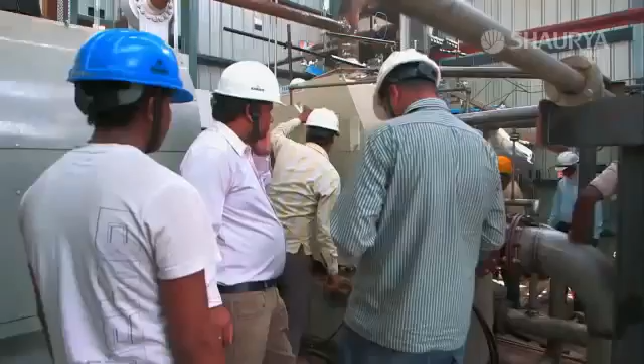We're just preparing for startup. So everything has to be in order before we can actually start up.

But nothing seems to be going as per the plan. The alignment of the shaft for the turbine seems to have taken longer than anticipated. There's a minor change in the dimensions of the shaft because it's a 25-meter long thing, and you have to achieve the tolerance of around 0.03 mm.

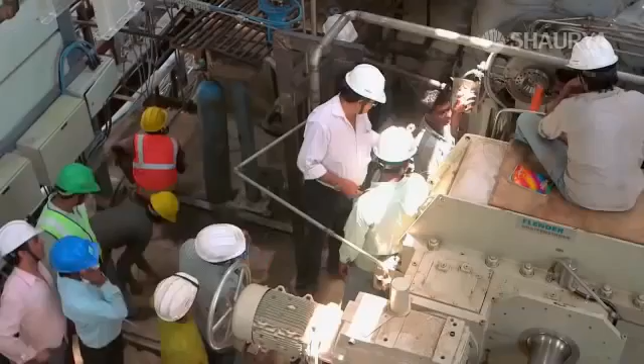Until today, the team has remained ahead of time. But now, time is ticking away, and the team is struggling to keep up.

Final alignment check is happening, and then we have to connect the coupling. We are delayed by around 12 hours.

Can this mega structure prove itself in the face of adversity? Is the plant truly ready to create a milestone in Indian history?

Mid-April, in Rajasthan, almost 190 kilometers from Jodhpur, the temperature soars well above 48 degrees, and the blowing sand forces the local residents to stay behind closed doors.

But for the 1,500-strong workforce of Godavari Green Energy Limited, it is the perfect day to be out, because this is the weather that will transform these 400 acres of barren land into a sea of abundant energy.

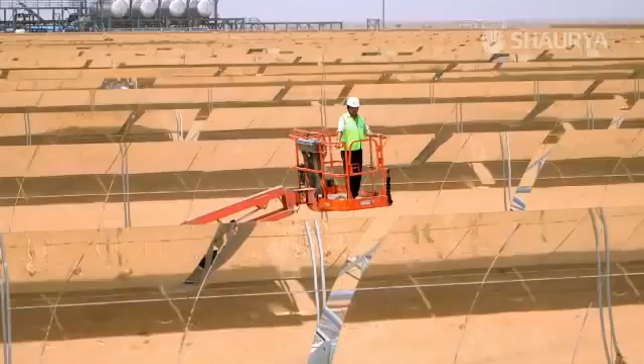At the helm of this mega dream stands the man with a bold vision and a strong resolve. He is Mr. J.P. Tiwari, CEO and Director, Godavari Green Energy Limited.

As soon as we landed on this site, we knew that this is a completely different kind of land where we have to work. We had no experience working on desert lands. It was quite difficult to demarcate the land where we had to start the work. We often lost track. We had to identify the corners of the plot, and then local Deshi jugaads were used to mark the places with red flags, and that's how we started the job here.

It was on these 400 acres of barren land that the first step in a long and difficult journey was taken. The foundation for this mega structure was laid a few kilometers away from the small village of Nokh, an area in India that receives some of the highest DNI, radiation received from the sun, as per data from NASA and the Indian Meteorological Department. We started with just the coordinates of this land and an idea that could power the nation sustainably.

The nation's population is well over 1 billion, and the energy needs of this burgeoning mass of humanity are soaring continuously. Today, India burns almost 700 million tons of coal every year, making our coal consumption the third highest in the world.

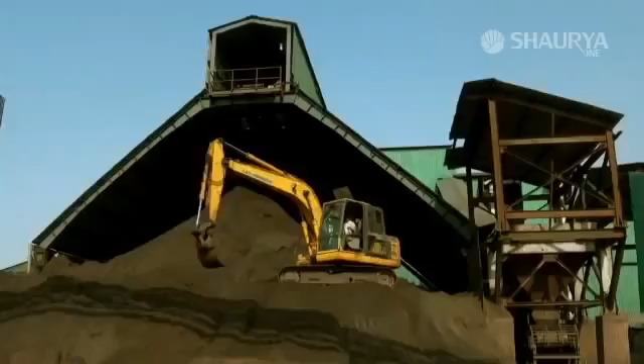As a result, India releases close to 1.9 million kilotons of carbon dioxide every year. As of today, emissions from coal-fired power plants have caused nearly 115,000 premature deaths. Despite the high cost, almost 290 million Indians still live in the dark.

It is estimated that by 2030, our carbon dioxide emissions from energy consumption will double, and more than 40% of our energy needs will depend on imports of fuel. Today, only 31% of our energy comes without fatal side effects.

It is time we stop digging for answers in the bowels of the earth. We must stop exploiting the earth's fast-dying resources and harvest instead a source of clean, free and infinite energy. One that has been benevolently blessing us with life all this time. The sun.

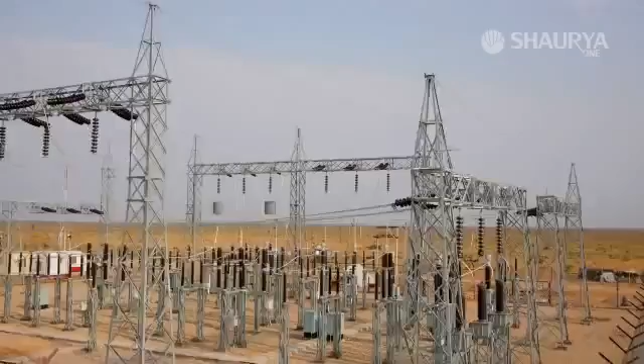The Jawaharlal Nehru mission aims to produce 20,000 megawatts by 2022, out of which the first phase, ending this year, will be 1,300 megawatts. 500 megawatts of this power will come from a technology never tried before in India: Concentrated Solar Power, or CSP, also known as solar thermal technology.

Concentrated solar power doesn't create electricity directly from sunlight. Instead, it captures and concentrates the rays of the sun to create heat, which is then used to generate power.

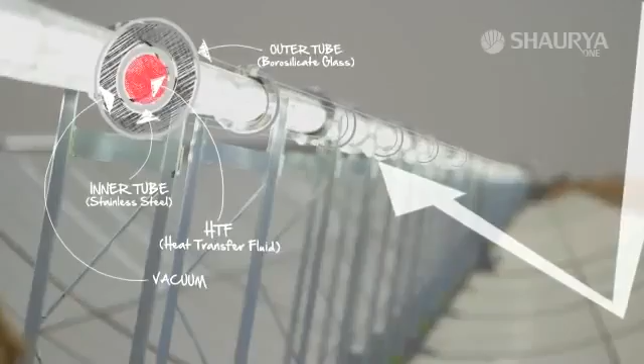With the vision of a sustainable future, Godavari Green Energy Limited set out to be the first of the 7 companies chosen under the Jawaharlal Nehru National Solar Mission to set up a solar thermal power plant in India. Godavari Green Energy Limited is a subsidiary of Godavari Power and Ispat Limited and is part of the Hira Group of Industries.

We understand the potential of green energy, not only in terms of environment, but also in terms of the economy.

With single-minded determination, the company broke ground on the ambitious project in November 2011. The land was acquired, financial closure done, and the next step was finding a good technology partner who could make this project a success. We roped in Abilene-based technology partner Lauren Engineers.

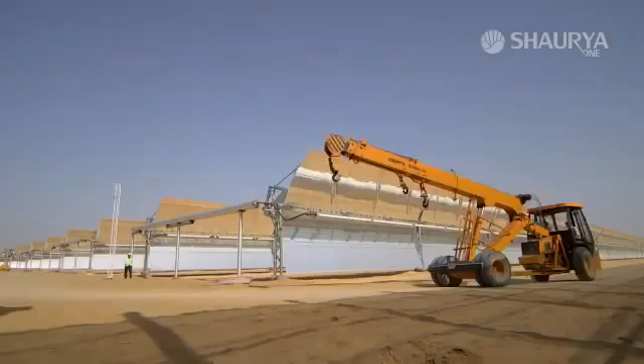The endless opportunities of this land soon became apparent. However, nobody in India had the requisite experience and expertise needed to set up a solar thermal power plant of this magnitude. With experience building a solar thermal power plant in the USA, the team behind Nevada's Solar One, Lauren Engineers, were the perfect fit for the job.

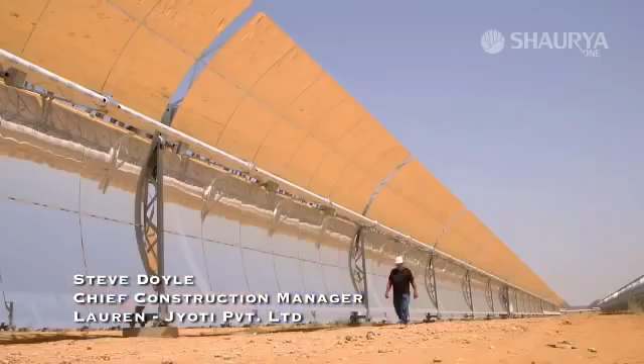My name is Steve Doyle. I'm from the U.S. I am the Chief Construction Manager.

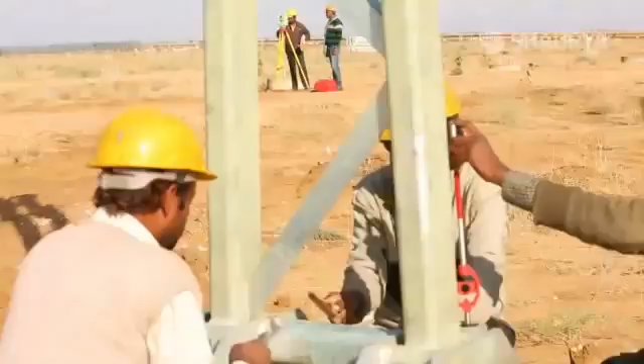The first and immediate challenge that lay before Steve was the foundation of the plant's lifeline, its 4 massive solar fields. These solar fields will have to endure temperatures that vary from -2.5 to well over 50 degrees Celsius in a year, and wind that often blows at a speed of 50 kilometers per hour.

The first step in the construction of the solar fields was the installation of 6,000 pylons. This is one of the pylons that's fabricated, and then it's hot dip galvanized for corrosion protection. It should last for 25 to 30 years.

This is a German design, and it has some minimal tolerances. We had to go out to fabrication shops and see if they were able to fabricate these parts for the frames, the pylons, and cantilever arms. It was a very difficult task.

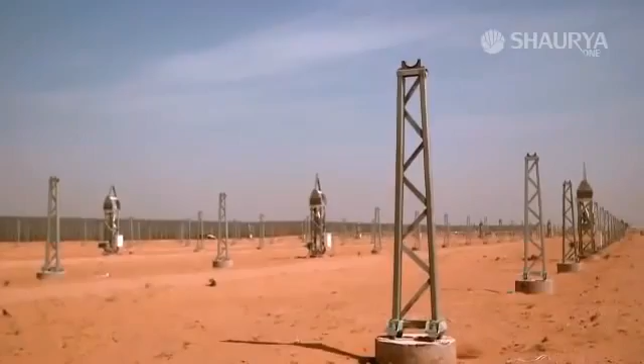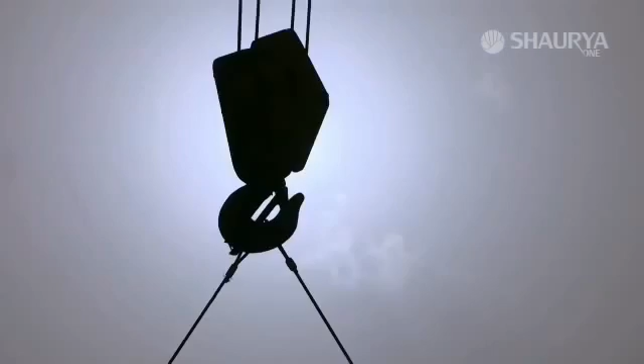The workforce took up the daunting task of installing these pylons in 240 rows. Once the pylons were erected, the crew began to assemble and install the 5,760 frames for the parabolic mirrors. Each day the crew strived to meet their deadlines and assemble an average of 40 frames a day.

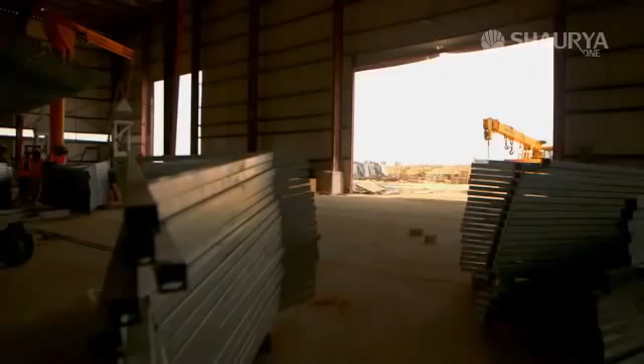This task would have been challenging for a trained team of professionals. But for the untrained laborers of Rajasthan, it threatened to be nearly impossible.

One of the hardest problems starting this project was the training process. We had to train all the people that worked on this project. Most of them are local people; all they've done all their life is farm. We took time to teach them the special duty, the tasks they perform, and they have turned out very good work. The language was a problem, but we placed supervisors who could speak English and Hindi.

So it takes 25 to 40 minutes to do both sides. Yes sir. Then you pick it up and set it on the stand, and then our turning unit will come down. It grabs and it rotates.

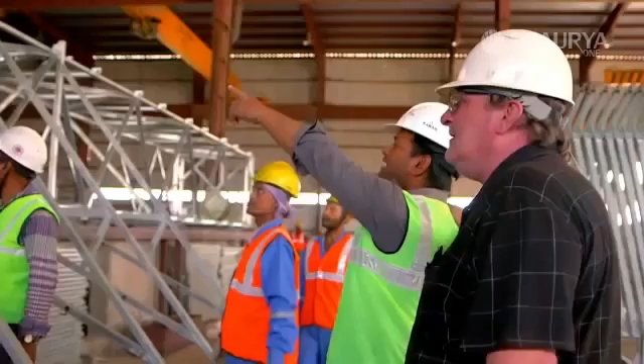Under the supervision of Hindi-speaking supervisors and Steve's guidance, the indigenous labor force proved to be quick learners. One Indian word that I've learned over a year is theek, okay.

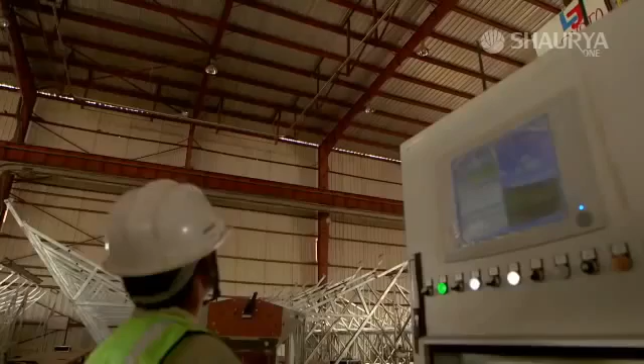Once the frames have been declared theek, they undergo photogrammetric testing. A high-definition camera clicks 38 photographs of the frame. Its software automatically verifies the dimensions of the trough to ensure that it will accurately concentrate the rays of the sun onto the receiver tube.

After this process, the frames will be ready for the most delicate and expensive component of the plant: the parabolic solar mirrors.

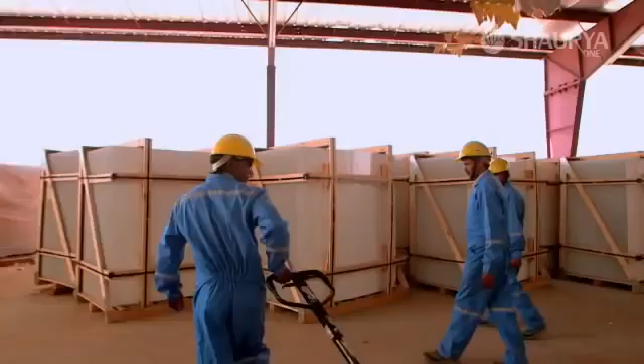We had these mirrors from Flabeg. Flabeg has manufacturing units both in the US and Germany, and in fact some of the mirrors came from Germany and some from the US.

These cutting-edge $75 a piece mirrors have to be fitted onto each frame separately.

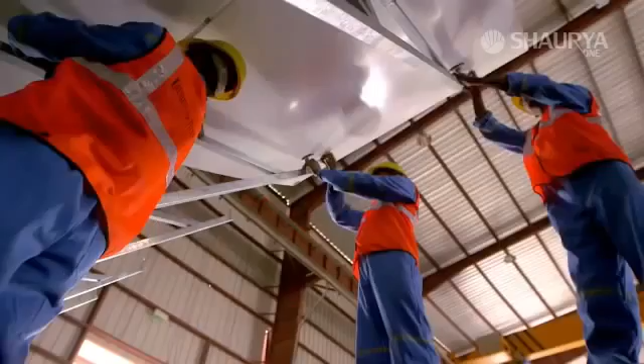Mirrors have to be as clean as possible. You need to reflect as much radiation as possible into these receiver tubes that act as thermal storage or thermal absorber. If there's dirt on this, you have interference and the radiation going back to the absorber would be less. So you would actually be generating less power from the sun than what is expected.

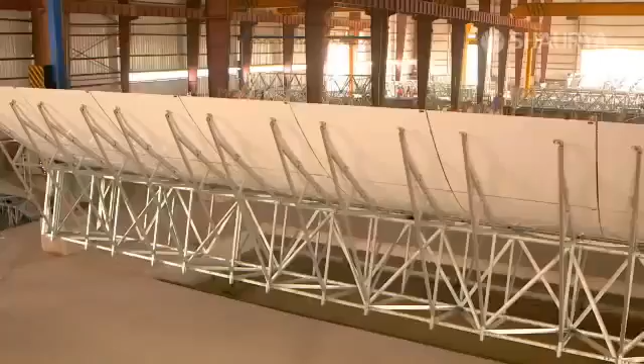Every frame holds 28 mirrors, creating one solar collector element. These mirrors are made of white glass and are extremely thin and clear, unlike regular glass, which has a green tint due to the presence of iron.

Coated with silver, one of the most reflective substances known to man, the solar collectors reflect more sunlight than normal mirrors. By the end of the construction, the plant will have 5,760 solar collector elements, or SCEs, installed in rows.

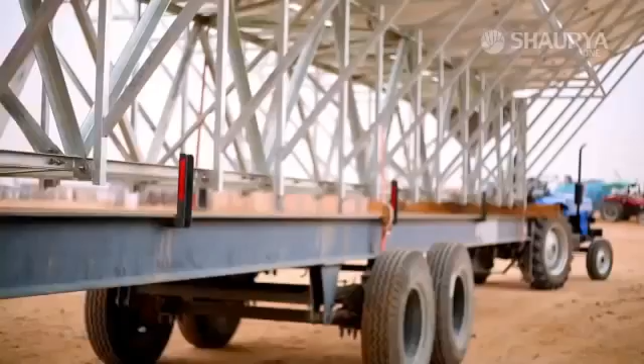The length of each row is the same as that of 4 massive Boeing 747s lined back to back. The team had only 6 months to finish installing all the solar collector elements, which was no easy feat due to their very delicate nature.

There are some limitations. Just like these mirrors are so delicate, we have to run the vehicle at around 5 to 10 kilometers per hour. In a 12-hour shift, we are erecting around 25 to 30 panels.

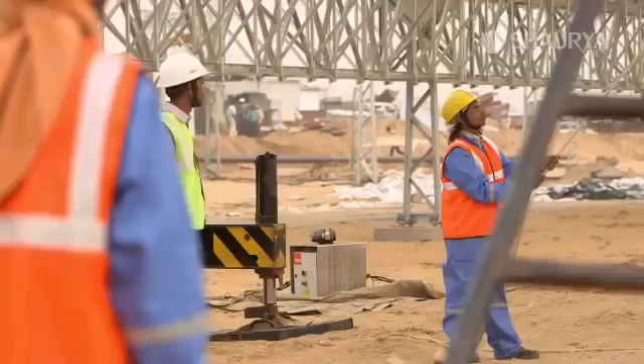This is a race against time, and we are trying to achieve it. At the peak of construction on the site, thousands of workers were working hard to stay on schedule.

Until they hit a roadblock. 7,835 mirrors had reached the plant in shatters. These mirrors were part of a consignment that had traveled a distance of almost 12,000 kilometers.

With only a few months left for the plant to be commissioned, several rows of solar collecting elements remained to be installed.

The 7,835 mirrors from one of the consignments, which had traversed a distance of over 12,000 kilometers, had reached the plant in shatters. These mirrors reflected their dreams, and as their shards lay scattered in the dust, it seemed a crack had appeared in their plans.

With only a few weeks left for the plant to be commissioned, several rows of solar collecting elements remained to be installed. These mirrors were insured.

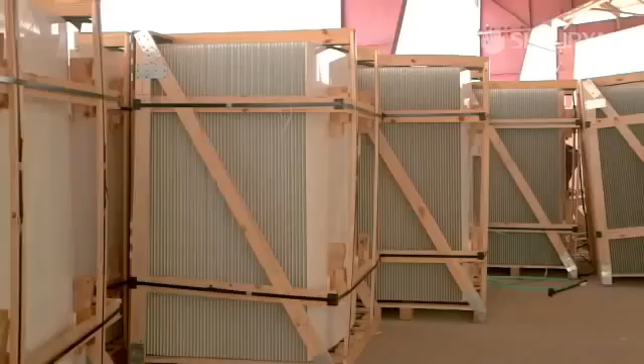We got it replaced. It took us around 2 months to get them back from Germany. And we still feel that even though we have lost 2 months, we would be able to make it up in good time. New mirrors arrived, and the construction resumed after a setback of 2 months.

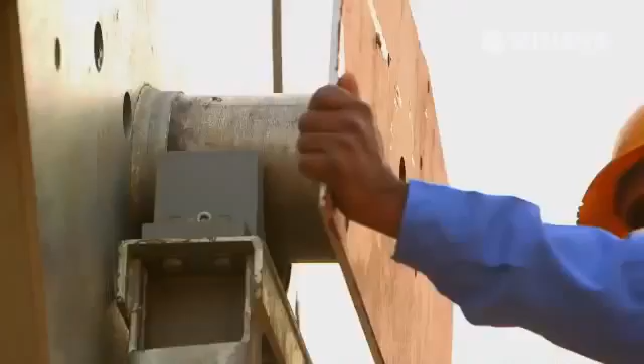To get back on schedule was a daunting task, but armed with experience and determination, the team doubled their efforts in assembling and installing the parabolic troughs.

Putting mirrors together is fairly simple. Building 5,760 parabolic troughs was a challenge.

4,000 parabolic troughs were in place. In the next 3 months, the team had to finish installing approximately 1,700 troughs to finish the plant in time for commissioning.

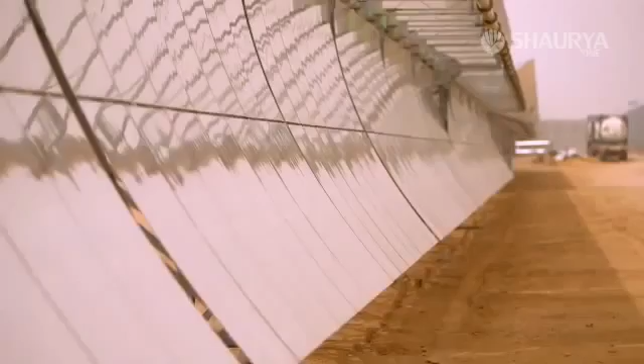Central to these operations is another expensive and complex piece of technology: the receiver tubes. These tubes are designed to trap the maximum amount of heat reflected by the mirrors.

This is the high-end product that actually absorbs the radiation coming in from the sun, being reflected from the mirror into this. This has a property like it has a steel tube through which the HTF is circulated.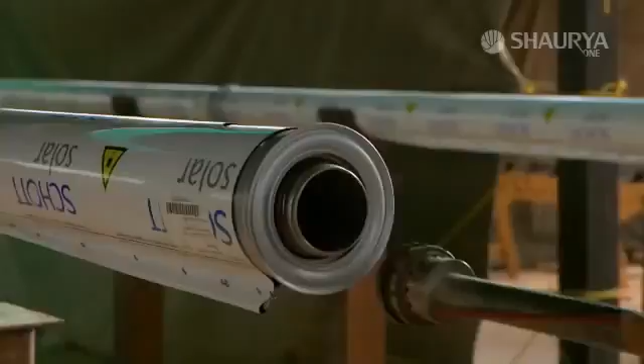Their construction involves the extremely difficult feat of welding glass with metal. This technology doesn't exist in India. The tubes at the plant are from Schott Solar, one of the only 2 companies in the world that manufacture them. These tubes reached the plant after covering a distance of more than 8,000 kilometers.

Once they reached the site, 3 of them were welded together to form a single 12-meter long receiver tube. The team's target was to eventually install 17,280 of these receiver tubes.

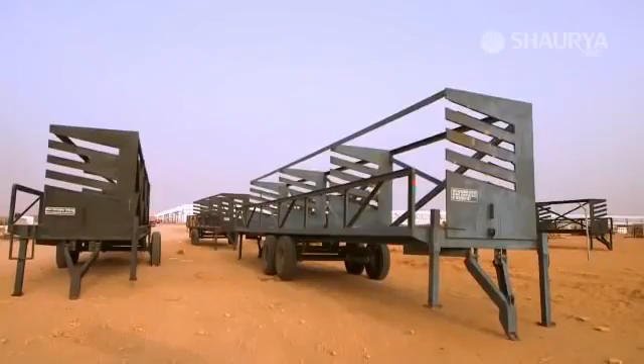However, safely moving these tubes to the solar fields was a challenge. For their transportation, 8 custom-made carriers had to be fabricated locally, each with a capacity of 72 tubes.

These thin tubes will carry 1,100 tons of heat transfer fluid, or HTF, through all 4 solar fields. This fluid will run through the 240 rows of solar collectors and heat up to a temperature of 393 degrees Celsius.

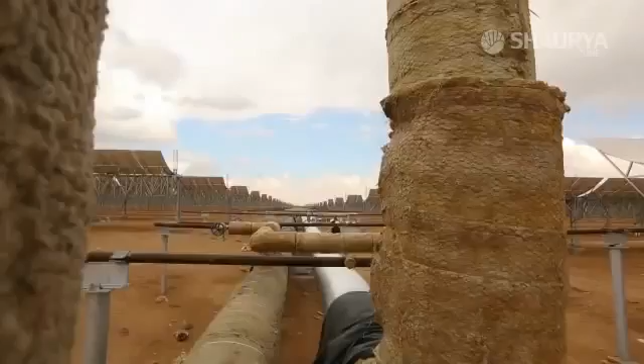This scalding liquid will then flow through seamless carbon steel pipelines. Clad and insulated with rock wool, these pipes will not let the fluid cool down.

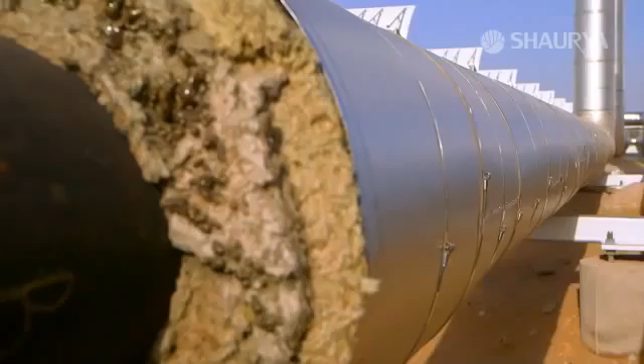Keeping the plant's commissioning deadline in mind, this heat transfer fluid was ordered well in advance and arrived at Kandla Port, Gujarat, one of the largest ports in India.

This fluid is manufactured in the United States and is transferred by bulk shipment to India. Depending on the design of the concentrated solar power plant, the plant may require anywhere from 20 to 30 metric tons of fluid for every megawatt of power.

In Godavari's case, their plant capacity was 50 megawatts, and we supplied approximately 1,100 tons of fluid. This synthetic fluid must be stored at a temperature of 60 to 65 degrees Celsius and hence will remain here in these temperature-controlled shore tanks until the plant is ready.

From the solar fields, the fluid will then flow to its ultimate destination, the heart of the solar plant, the power block. This steel structure, worth rupees 180 crores, is the place where the sun's heat will turn into 100% clean energy.

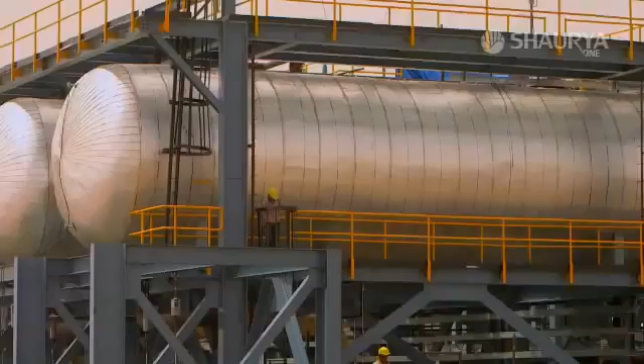It took a dedicated labor force of over 500 workers, working round the clock, nearly 6 months to complete this vital element of the plant.

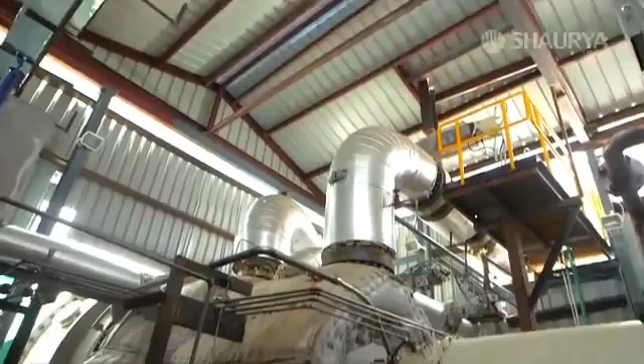At its center lies the most expensive element, its raison d'etre, the turbine. The 213-ton piece of machinery was shipped to India all the way from Sweden. When you consider the size of the plant, you begin with turbine capacity and then you back calculate all the other things that would be serving, like the steam generation required and then the heat of the steam, and based on that the solar field is designed.

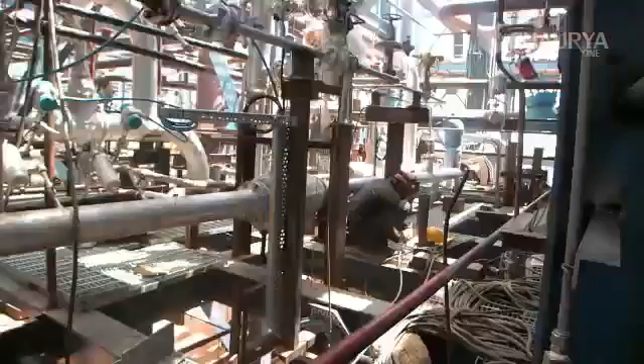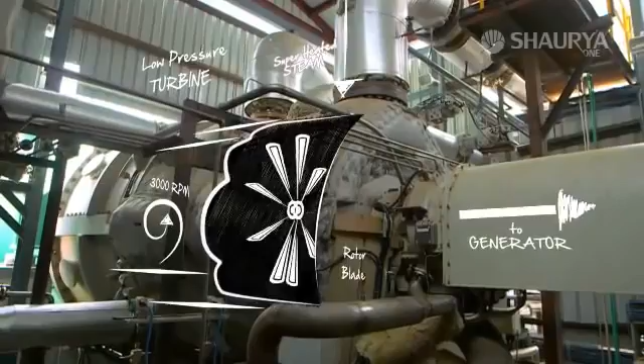Before the turbine can begin power generation, the fluid needs to reach the steam generator. Supplied by Aalborg CSP of Denmark, the steam generator weighs nearly 615 tons. Here, pipes containing HTF will exchange heat with 257 tons of water per hour, generating superheated steam up to the temperature of 385 degrees Celsius. This steam will then be used to power the turbine, which will then generate the precious megawatts.

At the end of construction, each component of the plant will be fully automated using proprietary software from Rockwell Automation. Each piece of machinery, from the parabolic troughs to the turbine, will be controlled with a single click.

When people come together to design the future of energy in India, it has to be ensured that their own energy doesn't run out.

Approximately 1500 workers are working in this area, and it becomes very important for us to create an environment so that the morale of everybody stays high and they can perform better.

And what better way to recharge than finding a family away from home? A family with which you can share your dreams. And friends with whom you can unwind and let go of the day's stress.

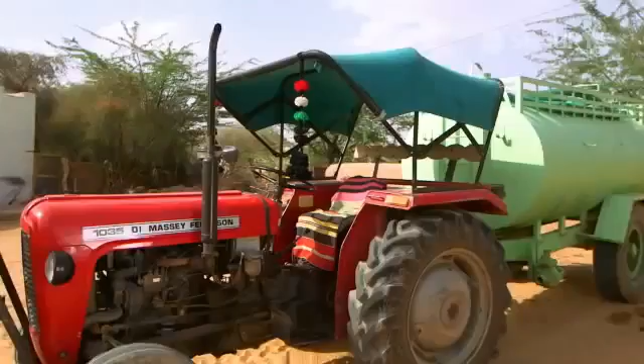Meet Raju and his brand new tractor. This is Raju's brother. This is their favorite ride, Raju's motorcycle. Raju wants his brother to grow up to be an engineer.

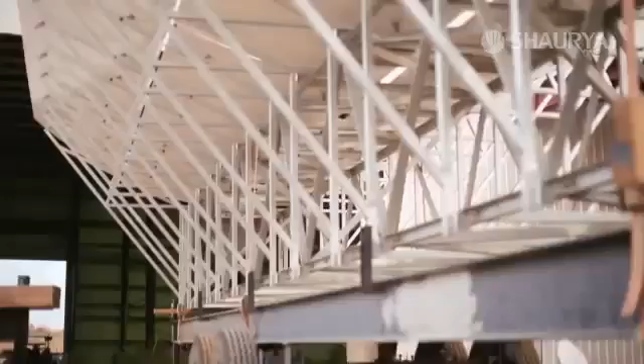This morning, the sun is shining a little brighter on Godavari. Today, Raju has a very important task to perform. Amongst his other tasks at the plant, he will drive the last panel on the 4th solar field.

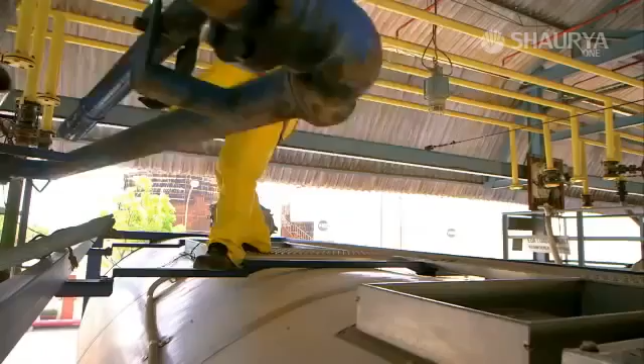Meanwhile at Kandla, the heat transfer fluid has been transferred from shore tanks onto 45 road ISO tanks of 24-ton capacity each.

These road tanks are on their way to the plant site, crossing 2 states and covering a distance of nearly 700 kilometers.

Today, after 18 months of work, the team is entering the final innings. They have assembled the parabolic troughs that will gather the sun's rays.

This is the last trough we are erecting, and this will complete our 120th loop.

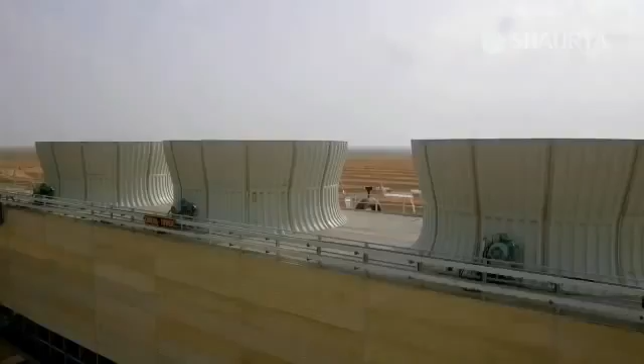Thus, the last jewel has been added to the centerpiece of this plant, the solar fields. In spite of being challenged at every step by both nature and technology, the team has met the deadline. In just 18 months, they have transformed hundreds of acres of barren land into state-of-the-art solar fields.

We are happy now, and our next step is to run the plant, start generating the megawatt. So I congratulate all of you, and let us look for the new target.

The fields are complete. The team's next challenge is to become the first of the 7 solar thermal power plants under the Jawaharlal Nehru National Solar Mission to generate power, and to prove that in the long term, solar energy is a viable economic option.

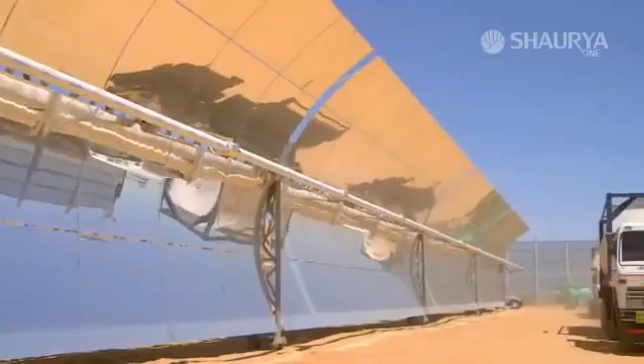The heat transfer fluid has arrived from Kandla port just as the solar fields are ready. As soon as the fluid arrives, the team begins to empty the fluid from the road ISO tanks to the HTF expansion vessels. Once the heat transfer fluid is in the pipes, the pumps must be started to ensure that the fluid circulates throughout the fields.

In keeping with internal deadlines, Mr. Avikal Dubey needs to have the HTF pumps up and running by tonight. It is proving to be a long night for Mr. Dubey and his team. They have been working ceaselessly with the sole agenda of having all 4 pumps running before sunrise. And just before dawn, the team meets with success.

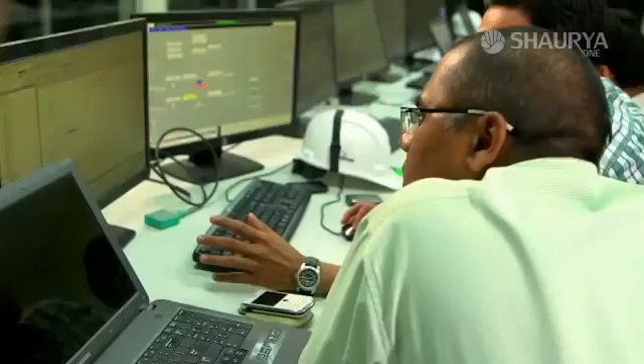One milestone you can say we have achieved, that we have given command from this DCS system and the motor is started in the field.

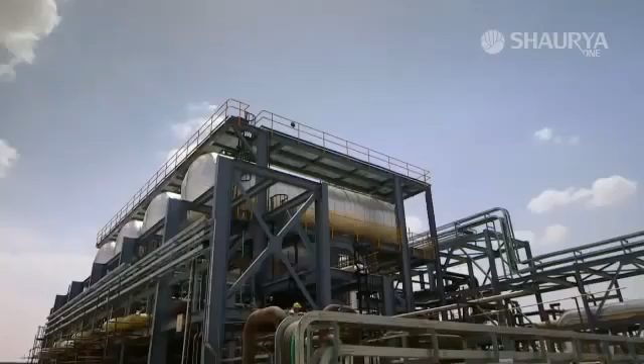It is now time for the last major process before commissioning, air and steam blowing. In this process, the pipes that will carry the superheated steam to the turbines will be cleaned.

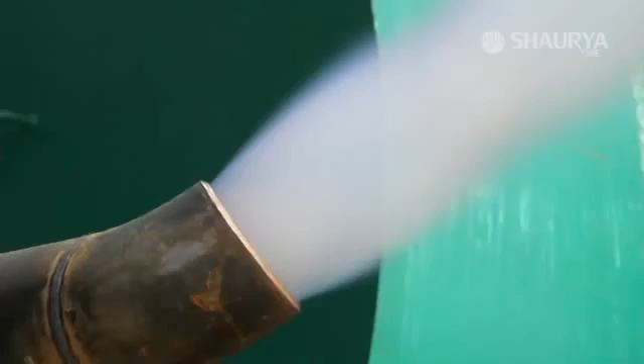With air and steam blowing over, the team gets busy carrying out final checks and balances before commissioning. With so many components coming together, things can often go wrong.

This time, it is the solar collecting elements. We have put these solar panels in auto mode. They will automatically track the sun. Most of the panels are right now tracking.

A few have a little communication problem, like a command that is generated from the DCS that comes to the local panels, and few of them have a little communication problem in the fiber optic cable or in the card. So our instrumentation guys are checking them.

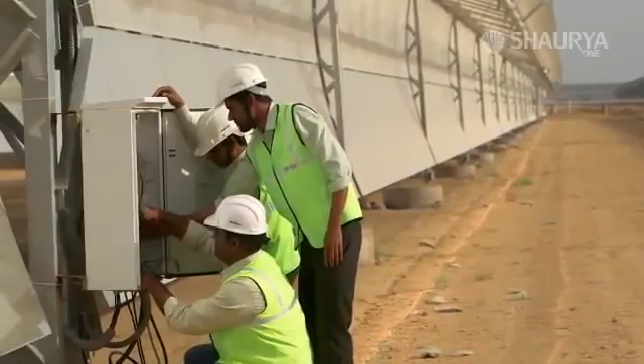Once these defective panels are attended, the communication is set properly. It will be put on track mode automatically, and the whole solar field will start tracking the sun together as a group. These solar collecting elements will move approximately 15 degrees per hour to track the sun, their only fuel.

Components of the plant are in place, and the destination of this remarkable journey is near. The day of commissioning approaches, the day when all these components will come together to generate power.

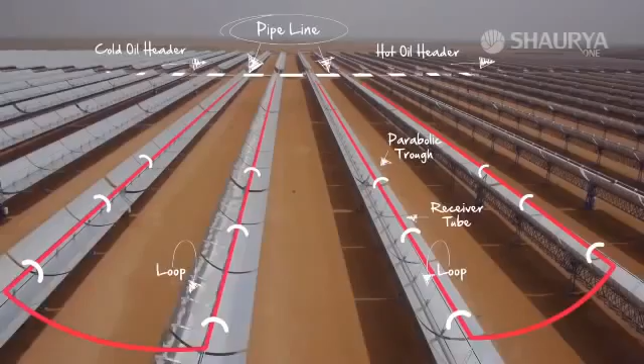The parabolic mirrors will focus the sun's rays onto the receiver tubes filled with heat transfer fluid. The HTF will then travel through all the solar collecting elements in a solar field, absorbing more and more heat. Eventually, its temperature will increase to nearly 393 degrees Celsius.

This extremely hot fluid will then pass through the steam generator, where water is turned into superheated steam. Finally, this steam will drive the turbine to produce electricity.

What had started out as a mega dream will today become proud reality. The day of commissioning is today. Mr. Tiwari is leaving early to take charge of the final countdown to harvest the sun.

Stresses will always be there. Things would deviate from the plan. Something new would definitely come up. We have to find out a way through it.

We would all be concentrating on the turbine. So the only thing that remains is pushing the steam into the turbine, rolling it, checking the condition and health of the machine, and then you just put the load.

Getting close to the commissioning, it's getting really stressed out here. People have given themselves day in and day out, and it's really getting hard. Things are getting wavered, and people are trying to make sure that everything is being synchronized with each other. So yes, it's tough times, but the hard work's still going on.

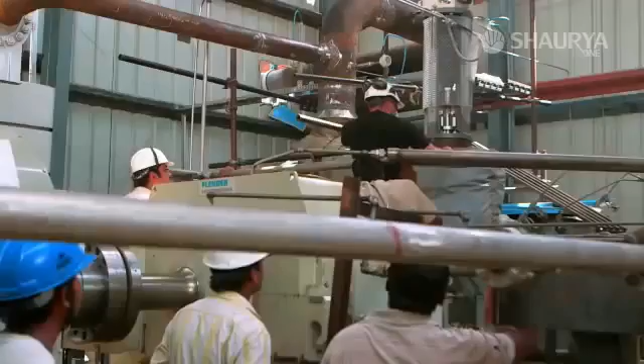There is a rush of activity as the team readies the plant to generate power for the first time. In just 19 months, the team has done the impossible, and today, India's first solar thermal power plant must prove itself by supplying power to the national grid.

Everything is in order. Just the last steps remain. The turbine needs to be put in gear. Engineers from Siemens, the turbine manufacturer, are present in person to oversee the process.

We're just preparing for startup. So everything has to be in order before we can actually start up.

However, all doesn't seem to be going as per the plan. And this time, it threatens to be more than a glitch.

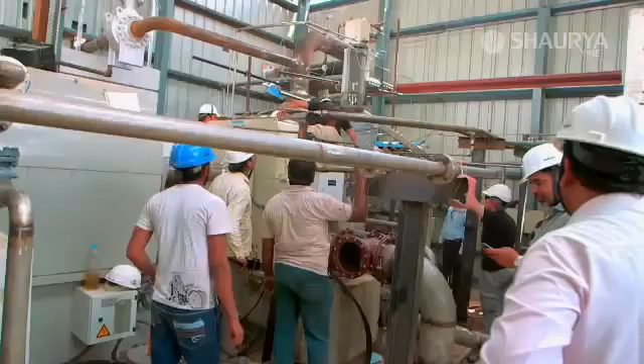There's a minor change in the dimensions of the shaft because it's a 25-meter long thing, and you have to achieve the tolerance of around 0.03 mm. So this kind of minor micro error can happen with this temperature.

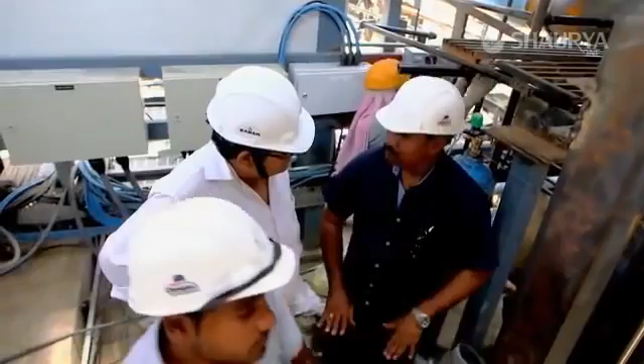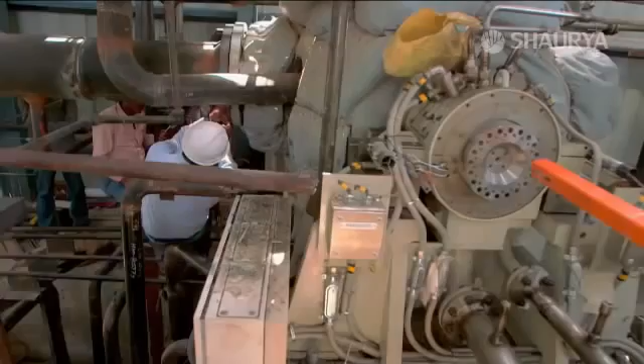Until this day, the team has remained ahead of time. Today, time is ticking away, and the team is struggling to keep up. The temperature, which was ideal for solar power generation, isn't ideal for metal shafts of the turbine. Due to the extreme heat, the shafts have expanded and are currently a few millimeters too wide to be connected together. The only solution is to wait for the temperature to cool down and make the shafts shrink back to their normal size. The turbine cannot be put into gear until the shafts are aligned and connected.

Time is racing ahead. Because it is a continuous process, we cannot stop it. And you can see a concern on everybody's face. Everybody is worried about how it will start, and because we have got the time limit now, final alignment check is happening, and then we have to connect the coupling. We are delayed by around 12 hours.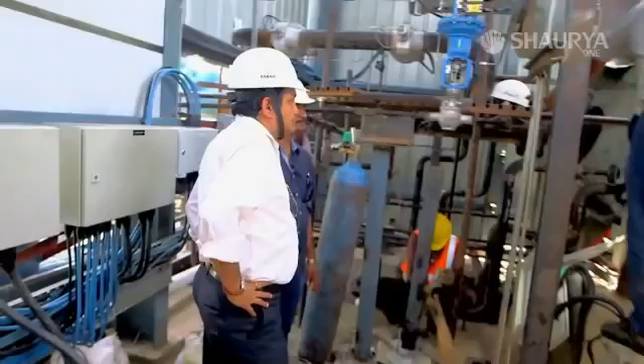Mr. Tiwari meets with his team to discuss the next course of action.

Days pass as the team faces a slew of unforeseen circumstances, from technical glitches to the onset of the monsoon season, each serving to delay the final day of commissioning.

After a significant delay, the day of commissioning arrives at last.

Now we stand here and we see that we have created history, and we are on the verge of commissioning the first solar thermal plant. And it itself is such a mega structure that really astonishes me, myself, and the whole team that's been involved in this project.

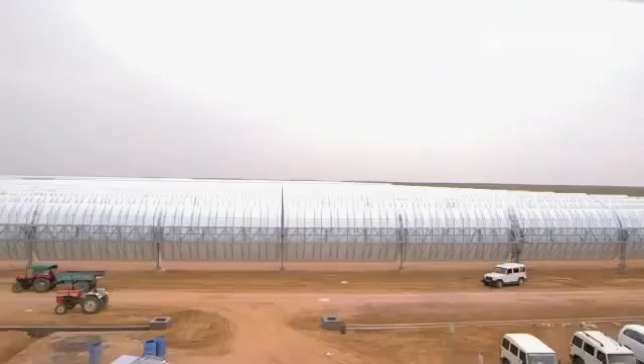According to the guidelines, the plant must generate electricity continuously for 1 hour for 3 days to be declared commercially operational.

Unfortunately, due to a few teething issues, our commissioning got delayed. Today we are at the stage when we would be generating on the third day for continuously 1 hour as per the guidelines defined by Jawaharlal Nehru National Solar Mission. And doing this, we would become the first solar thermal power generating plant in the country to actually commercially operate the plant.

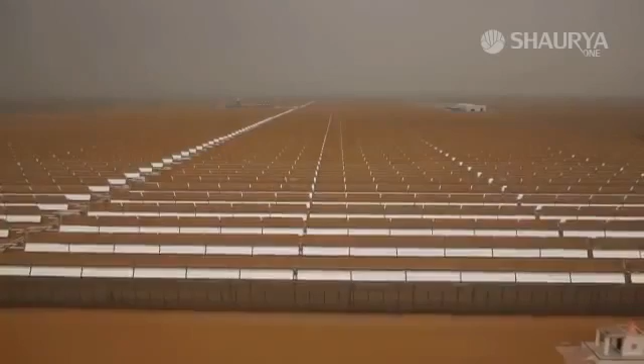It is the final hour of the third day of the commissioning process. The plant has been generating electricity for the past 50 minutes. Only the last 10 minutes remain.

One minute is left. The team waits with bated breath as they count down the final minute of power generation.

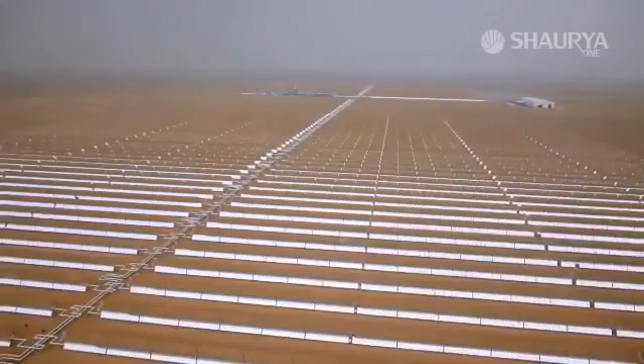We have just finished up with our last day of energy generation today, and now we're waiting for the certificate from the government authorities to be officially commissioned.

I'm still numb from it all. It's been such a long time. It's time to go home. It feels great, actually, yes.

With the successful commissioning of India's first solar thermal power plant, the country has taken a giant step towards a cleaner, greener, and brighter future.

It's going to be a very big thing for our country, particularly because it will be the first plant which is coming up out of all those 500 megawatts that have to be generated. This is the first plant which is coming up. And it is a great day for us because this was a completely new energy. We had no knowledge whether we'll be successful in it or not, but we have done well. And the company has done very well in getting this up.